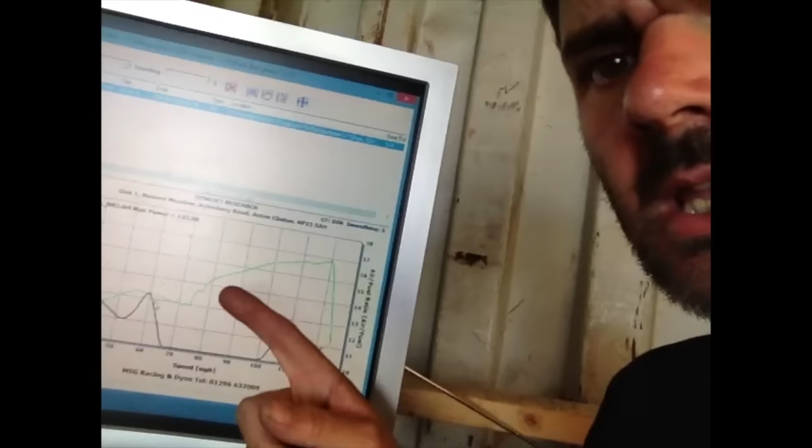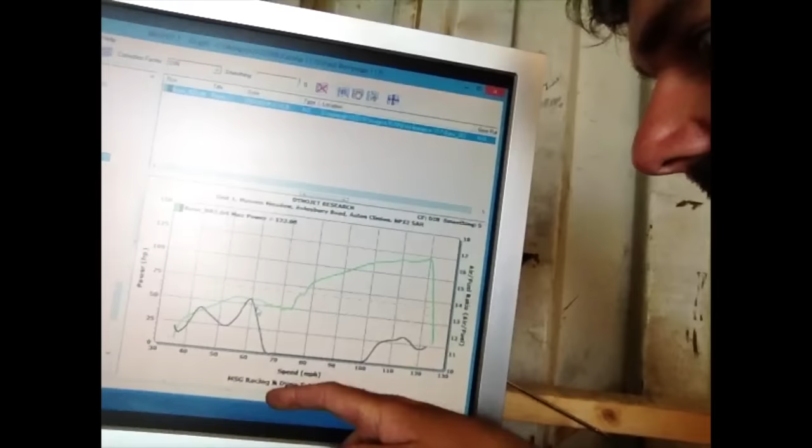So what we're looking at here is the air-fuel ratio. The red line is where we want it to be; under the line is rich. It was rich, it drops off the scale with richness, then comes back. That creates this flat spot in the space here.

It sort of cleans up at the top, and it still goes on to make 122 horsepower right at the top, which isn't bad numbers, but we've got a couple of things to chase on it.

Might be the spark causing it in the mid-range, because I'm using a lithium-ion battery and it doesn't seem after a few starts to generate - it may not be sparking quite strongly enough in the mid-range. So we're going to try and fit a different battery to it before we start messing around with the carburettor.

So it'll be interesting to see if that cures it. If not, then it will be main jet swaps, but I've got a funny feeling when we get to the bottom of the electrics we're going to find something that gets rid of that hole there.

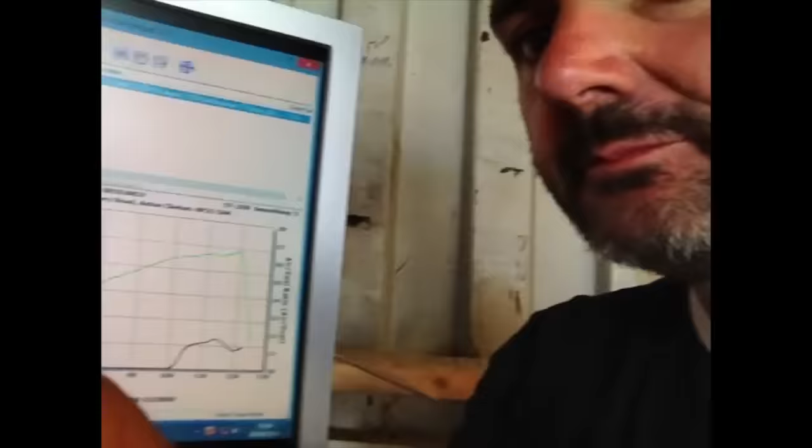Okay, so we've done the fourth dyno run. Power's gone up a little bit. It seems to be cleaning up as we run more and more, but it's still got a flat spot in it. So the next job is to change the jets on the carburettors.

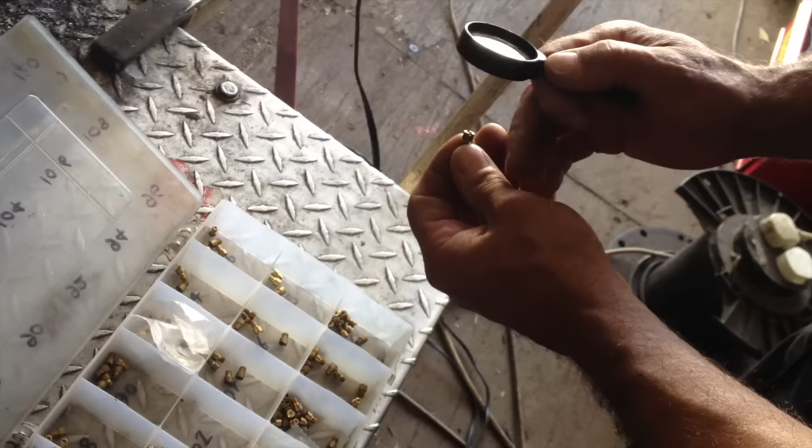Got 135s in at the moment, and we are going to go down to a size Sean's going to decide in a minute, but a little bit lower, and see how it cleans up when it's on the dyno next time.

So here we are, we have done 9 runs now, and we've gone through a couple of jet changes. We went down from a 135 to a 125, and that made things better in the middle, but it was too lean at the top.

So we've gone back to exactly in the middle of that. We've gone from a 135 to the 125, and now we're back at 130. Just had to check my figures there.

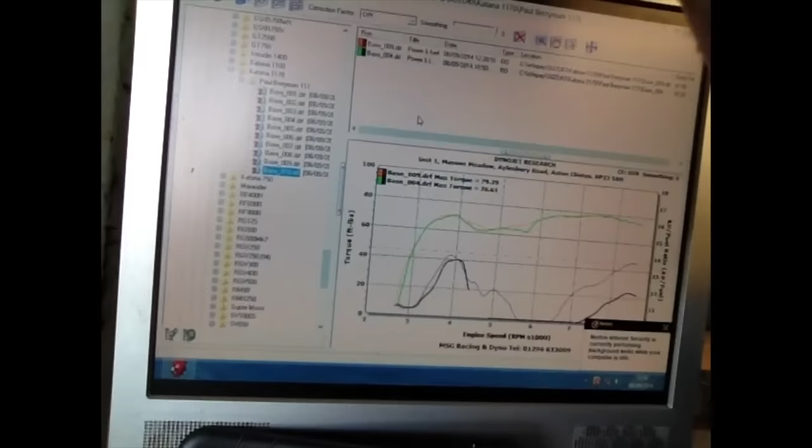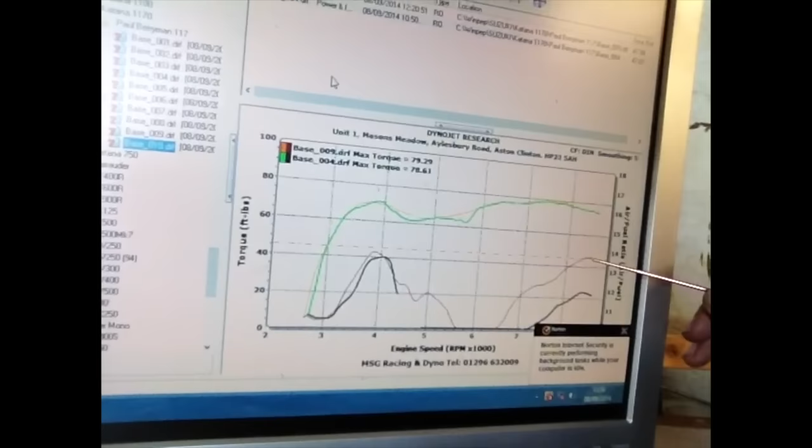What we've ended up with is at the top end, it's exactly bang on where we would want the mixture to be. The red line that runs across here is an ideal mixture. But in the middle, like from 4,500 through to 6,500 RPM, it's rich, very rich.

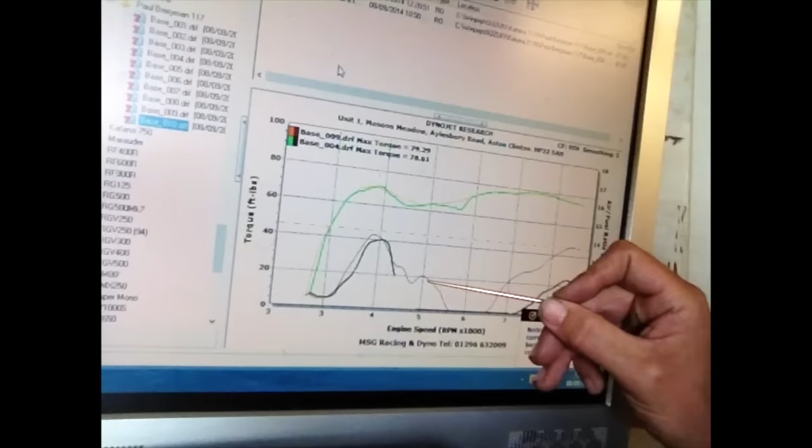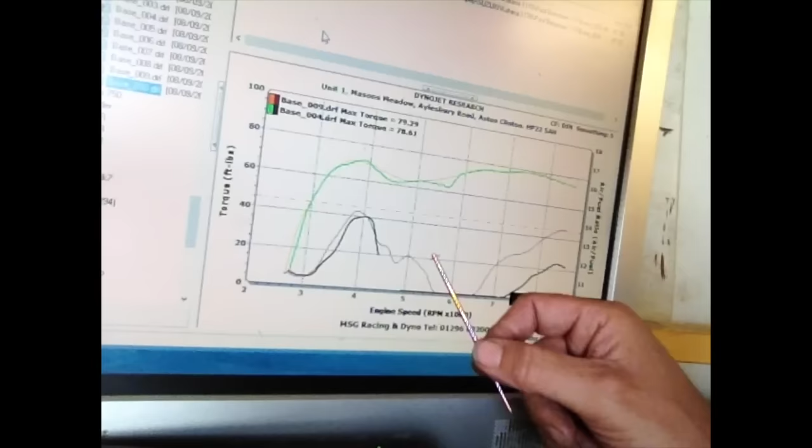So what we're going to do is lean that off. The only tool we've got to get to that is the needles, which may or may not work. So we are going to drop the needles a little bit, which should affect the throttle pickup in this part, which hopefully begins to do something up the middle of the curve.

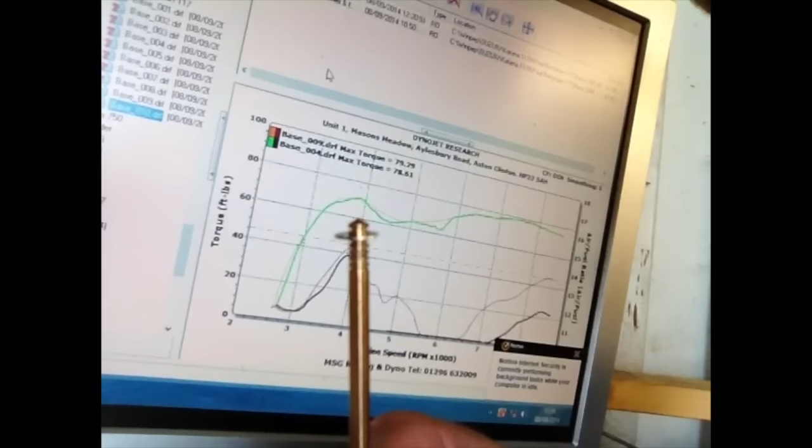Truthfully, we may not expect it to do much other than in this part here, but we're going to have a look. There's a needle, there's the clip - it's gone from the middle right the way to the last notch, but one from the top, so hopefully that makes the change we need.

So, after 19 runs, 2 jet changes, a needle drop and a change of battery, we ended up with an improvement of around 3 bhp to 125 and an extra 3 foot-pound of torque up to 80.

More importantly, we cleaned up a huge hole in the mid-range which really hadn't felt noticeable when we'd ridden at Donington the week before. Maybe it's too low in the rev range, or maybe my bum is just not as sensitive to power delivery as I think it is.

Anyway, after years of tuning fuel-injected bikes with a power commander, this day on the dyno with MSG was eye-opening. You ain't just plugging a laptop into this old girl to get a nice flat fueling line. Oh no, you have to work to get every scrap of improvement. But you know what? Since when was achieving easy things fun? This whole bike is testament to not doing it the easy way.